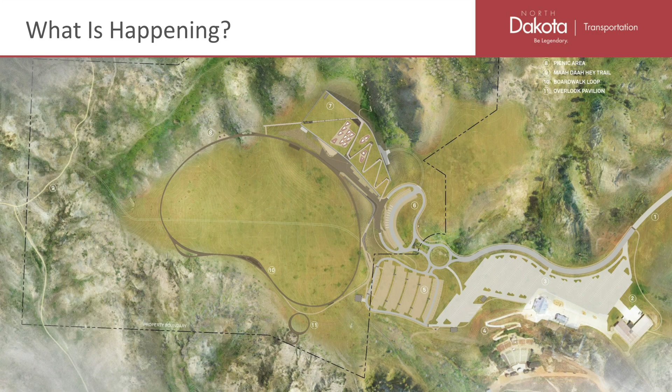As you are likely aware, the new Theodore Roosevelt Presidential Library is in the process of being constructed atop of the plateau adjacent to the Medora Musical and Pitchfork Steak Fondue venues. This image shows the master plan layout for the new facilities. The library is attempting to highlight and preserve the beauty of the Badlands for which Theodore Roosevelt, who the library is in honor of, loved so much.

Theodore Roosevelt is quoted in saying, "It is also vandalism wantonly to destroy or permit the destruction of what is beautiful in nature, whether it be a cliff, a forest, or a species of mammal or bird." The goal of the Chateau Road Reconstruction Project will build off this philosophy by fitting it into the natural terrain and avoiding undisturbed land as much as possible.

While preserving the natural environment, the design team is balancing the need for year-round access of the Presidential Library and the roadway changes that this necessitates. The project also intends to provide complete streets access for all users from Pacific Avenue to the Theodore Roosevelt Presidential Library, along with the existing musical and fondue venues.

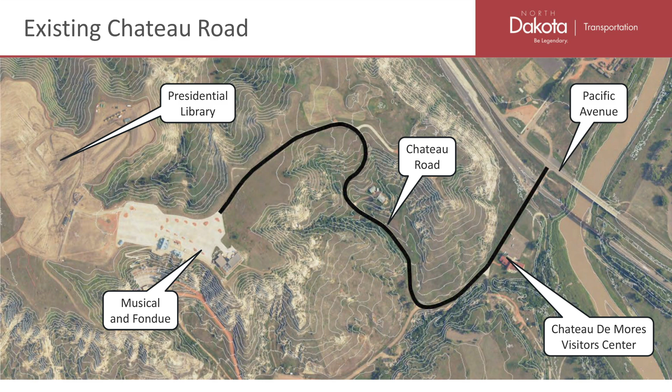We also want to reduce the steep roadway grade for a safer winter access and provide emergency vehicle access that would not be hindered by the high volumes of visitor traffic backed up along the roadway. This roadway project intends to replace the roadway from its intersection with Pacific Avenue all the way up to the entrance of the Medora Musical parking lot.

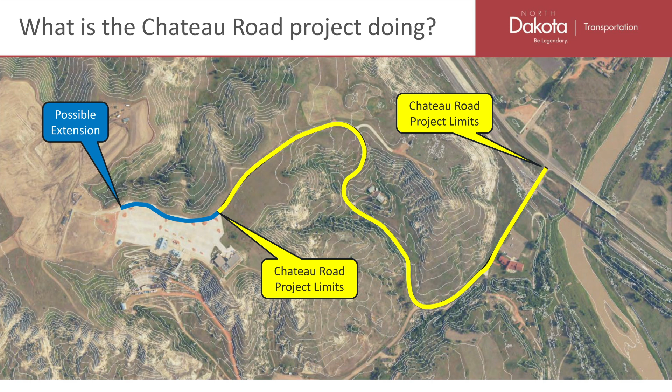However, the North Dakota DOT is currently having conversations with the Presidential Library about extending the roadway all the way through the current parking lot. I'd like to clarify that although the road is being constructed by NDDOT, they will not be the final owner of Chateau Road. Ownership is intended to be transferred to Billings County, and maintenance responsibilities will likely be given to the Presidential Library. North Dakota DOT's roadway ownership will end at Pacific Avenue.

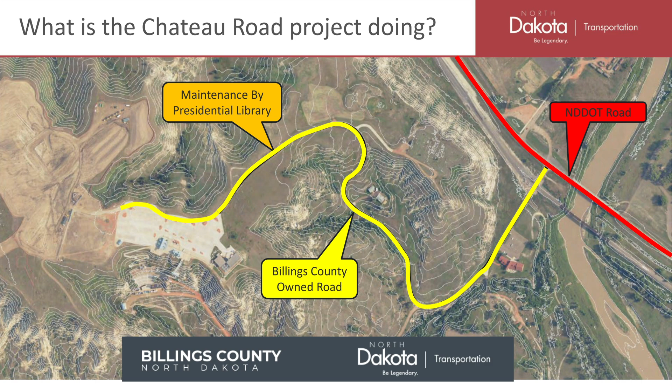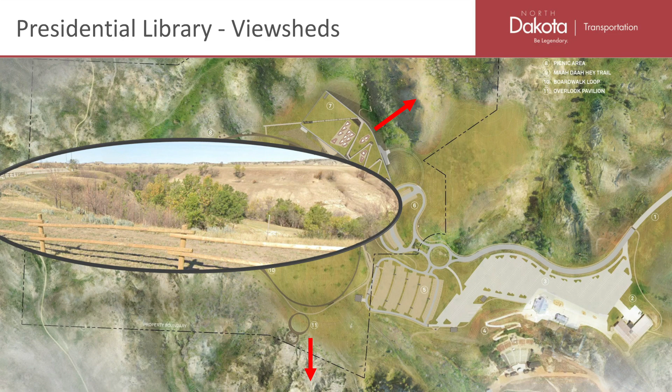I'd like to move on now to discuss the alternatives that the design team considered for this corridor. These lines represent alternatives presented to DOT by the Presidential Library Foundation for consideration. We reviewed these alternatives against the project goals of preserving the natural environment. Discussions with the Presidential Library team revealed that the new facilities intend to highlight both south and northeast view sheds, which are largely comprised of undisturbed land.

We also noted that the musical and fondue venues capitalize off the undeveloped, wild western frontier viewscape looking south. As noted in these images, an access road south of the musical would put vehicular traffic in view of the audience sitting in the amphitheater.

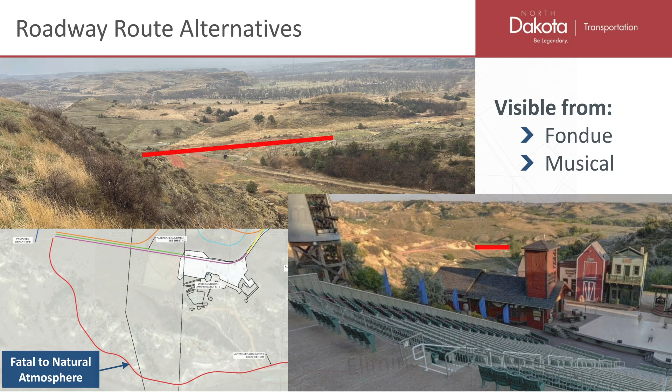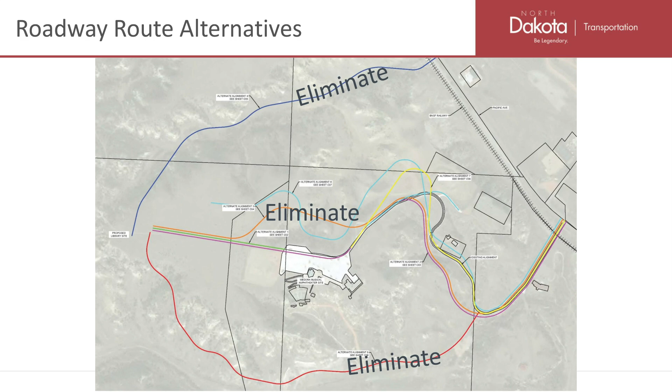This led us to determine that an access route piercing through these valuable natural panoramas would be fatal to the atmosphere of both venues, which resulted in our determination that access routes disturbing these view sheds should be eliminated from further consideration. This left us with a roadway corridor that would need to closely follow the original Chateau Road alignment. However, this route has challenges the design team needed to solve.

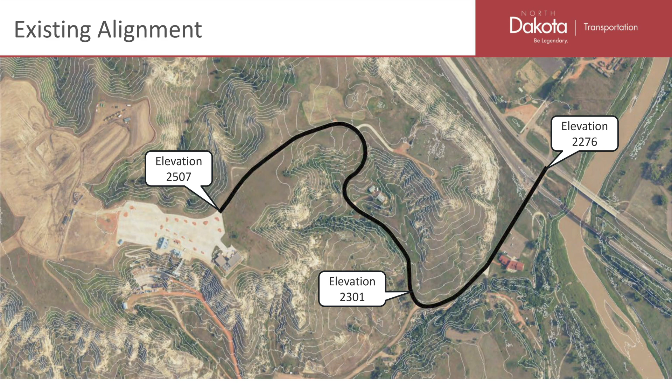As you can see here, the roadway ascends 231 feet, most of which is accomplished in the middle 1/4 of the alignment. This resulted in roadway grades as shown here, from less than 8% in green to 8 to 12% in yellow, and greater than 12%, actually up to 14.5% shown in red.

To flatten these profile grades within the areas shown in red or yellow, additional roadway length was required. However, full two-way access is required throughout construction to not hinder the construction of the library or the musical and fondue venues while they're active.

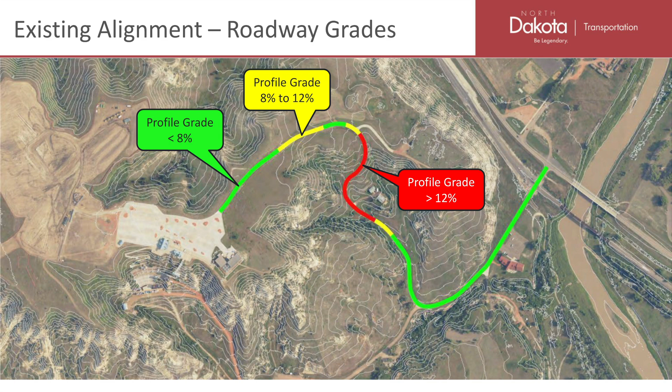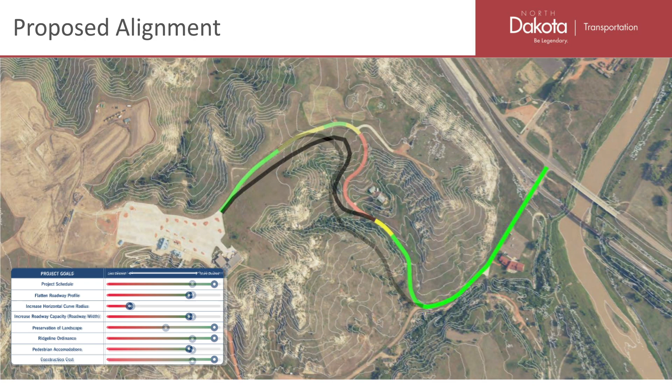To address these challenges, the design team reviewed several smaller alignment modifications, each of which had their own positive and negative attributes. Some of these alignments still impacted the terrain more than the team desired, and others did not provide enough benefit to meet the design parameters of the project. The final layout solidified on the alignment shown here. This reduces the difficult 14.5% grades to a manageable maximum grade of 9.5%, while fitting into the natural terrain.

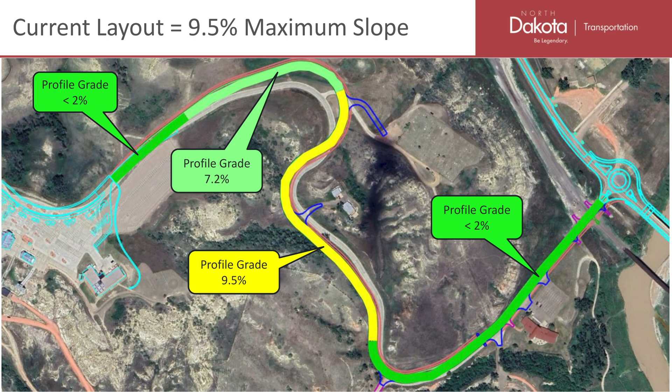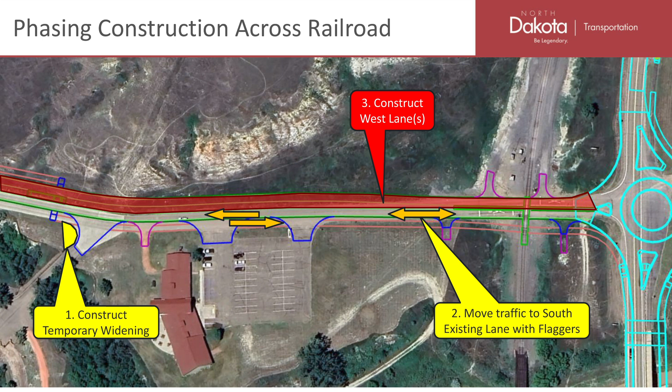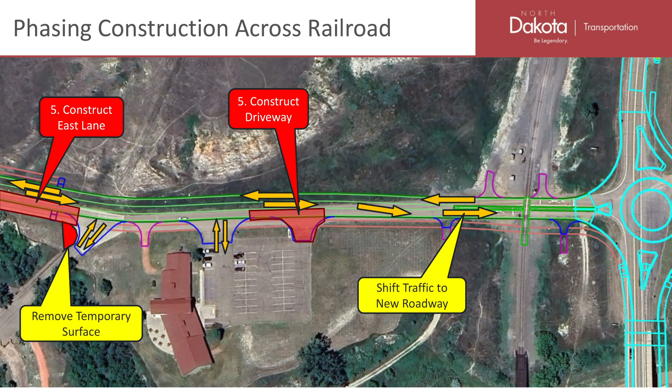The next challenge the design team has been facing was how to build the project while maintaining two-way traffic at all times. To do this, we decided to shift the new roadway away from the existing roadway enough to construct 2 traffic lanes without disturbing the existing roadway. However, requirements from the BNSF Railroad have necessitated the use of one lane of traffic for a short distance with flaggers. Once the first phase of construction is completed, vehicles will be moved to the new roadway surface, and the other half of the roadway will be constructed as much as possible. Subsequent construction phases will then shift accesses as needed while filling in the remaining gaps in the roadway, until the new roadway is fully in service.

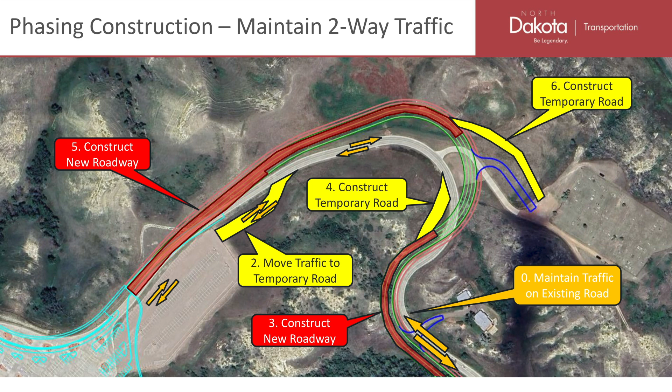Similar to Chateau Road near Pacific Avenue, traffic will be maintained on the existing road near the parking lot, while a temporary access is built at the top end of the project. Once traffic can be moved to the temporary roadway, construction of the first phase of the new roadway can begin. Vehicles will again be shifted to the new roadway surface, allowing the remaining roadway phases to be constructed, until the new roadway is fully in service.

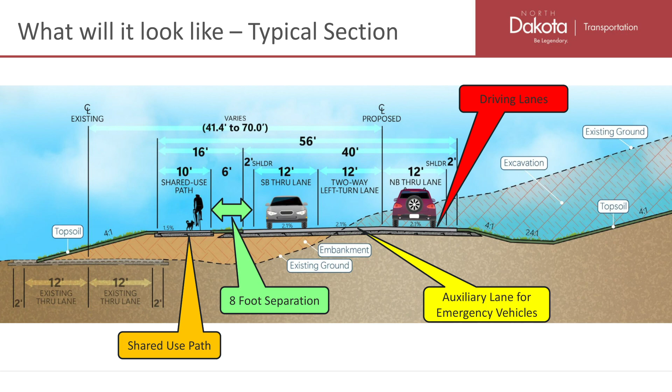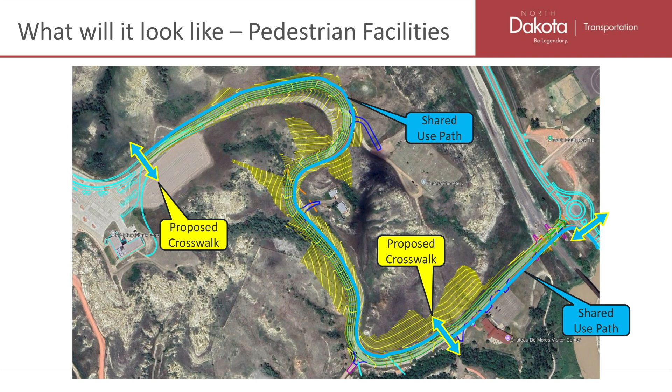The new roadway will be comprised of 2 driving lanes with a center auxiliary lane for vehicle overtracking and emergency vehicle access. A 10-foot shared use path will be constructed adjacent to the roadway with an 8-foot separation from the driving lane. The shared use path will start on the southeast side of Chateau Road and continue past the Chateau de Mores Visitor Center, where it will cross the roadway and then continue the rest of the way on the north side of Chateau Road to another crossing location just before the parking lot.

The pathway intends to use FHWA proven safety countermeasures to improve safety of these crossings. These measures include high visibility crosswalk markings and signage, along with dedicated lighting. In addition to these safety measures, this project intends to implement raised crosswalks to provide a physical measure that can be felt by vehicles, resulting in a permanent anticipation and awareness of the crossing, regardless of whether a pedestrian is present.

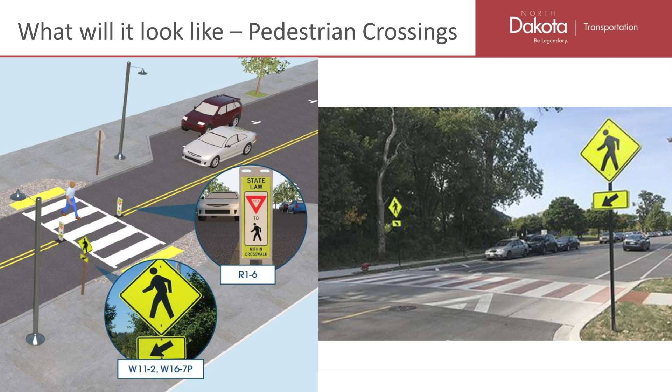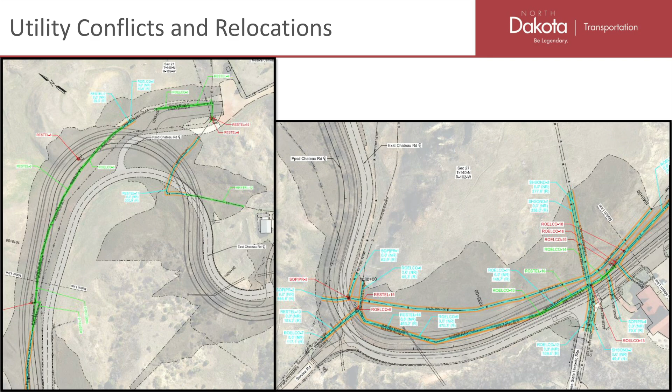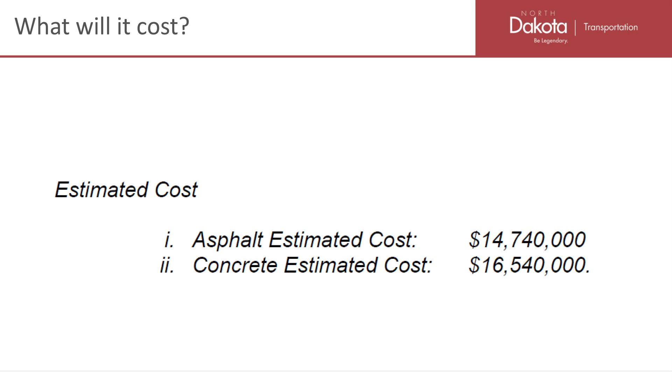The new roadway will impact multiple utilities along the corridor due to the roadway grade changes. We are in the process of working with these utility companies to have these facilities relocated. We have also estimated that the project will cost an estimated $14.7 million to construct with asphalt, or $16.5 million if constructed with concrete. Please note that these costs do not include the possible extension through the Medora Musical parking lot.

The project is moving forward to complete the environmental permitting process by January 3rd of 2025, which will set the project up to have a plan set ready to be bid on March 3rd of 2025 and have a bid opening of May 9th. We anticipate that the execution of the contract and mobilization of the contractor will result in construction starting in early July of 2025 and construction being completed prior to the Presidential Library grand opening on July 4th of 2026.